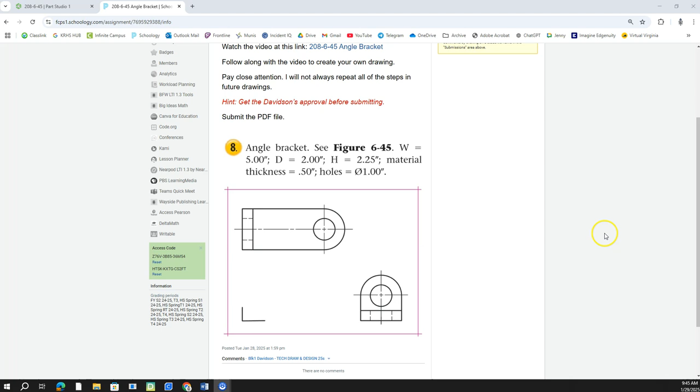Okay, we're going to be working on part 208-6-45. This is the video you're watching right now.

The angle bracket. Overall, the width from one end to the other is 5 inches. The depth is 2 inches. The height from the bottom up is 2.25 inches. The material thickness of the base is 0.5, and the thickness of the upright is 0.5. The holes going through it are 1 inch diameter.

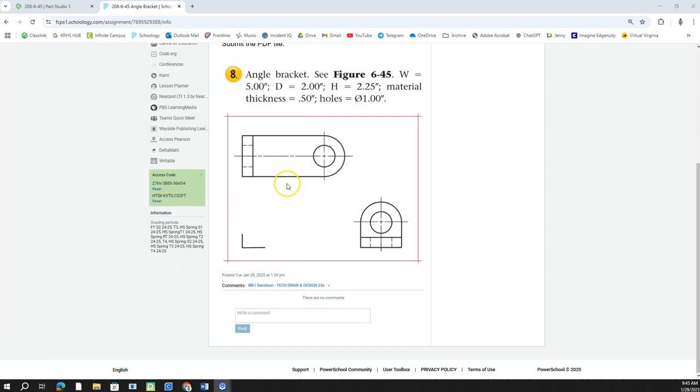In this view, they're giving you the top and the right side view, and your job is to come up with what the front view is. Should be easy in this program.

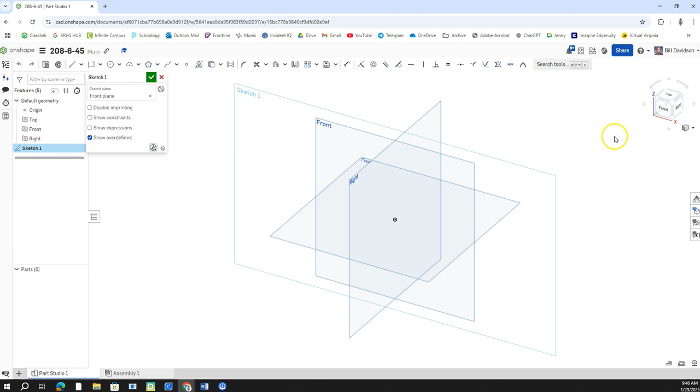All right, so we've got this established. I'm going to do this a little differently this time. I'm going to start with the front view, click New Sketch and View Normal To, and set that sketch plane.

I'm going to start by drawing a line that goes like this, from here down to here, out to here, like this, up here. I'm not worried about thicknesses or anything like that yet—I'm sketching first, constraining, then dimensioning.

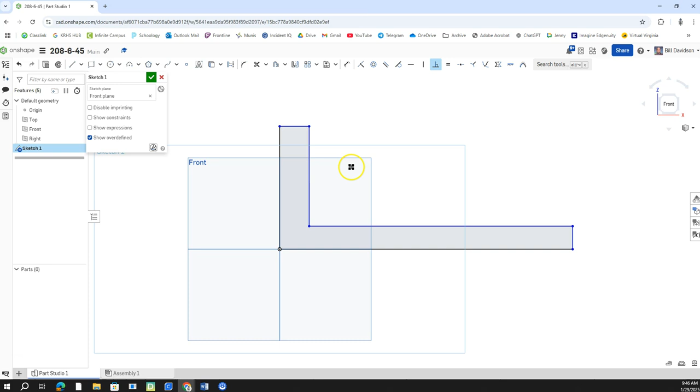All right, that's a little bit off, so I'm going to use the perpendicular constraint to make sure that's straight. If you can make it straight, great, but if you can't, that's all right too.

I'm going to put a dimension on this bottom line here because I knew that was 5 long. The height of it was 2.25, dimension on that one. The thickness of that was 0.5. And I'm going to say that these two are equal right here, this one and this one, so that should tell us what that is.

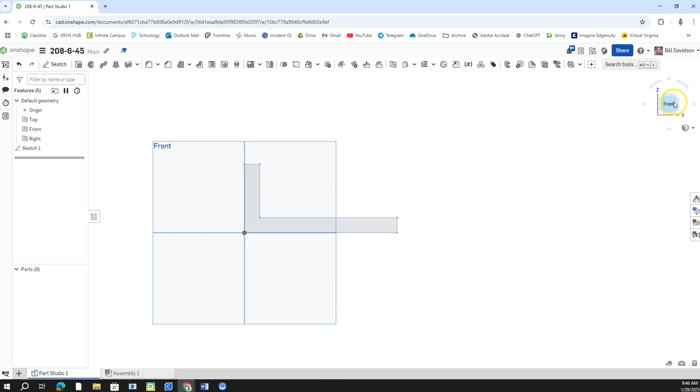So I'm going to finish that sketch, extrude that the thickness this way. And when I extrude this one, I'm going to do a symmetric extrude and change that to 2, so it extrudes in both directions, right there like that. And we should be equal, and we're good.

Now I'll go ahead and turn these off. All right, now this time, to make this fun, I'm going to use the fillet command, with a radius of 1 inch.

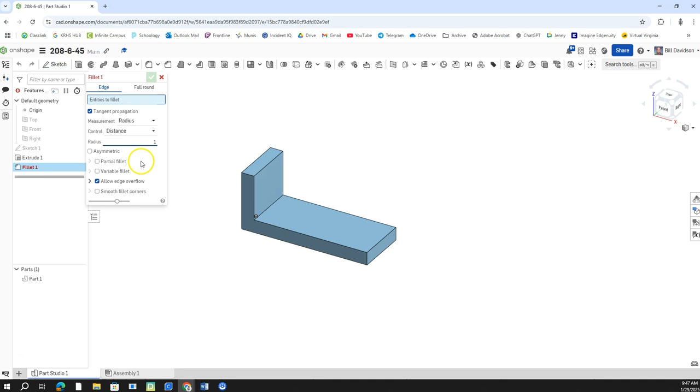I'm going to do one right here, one right here, one right here, and one right here. That makes those round edges, and I get everything the way I want it to be.

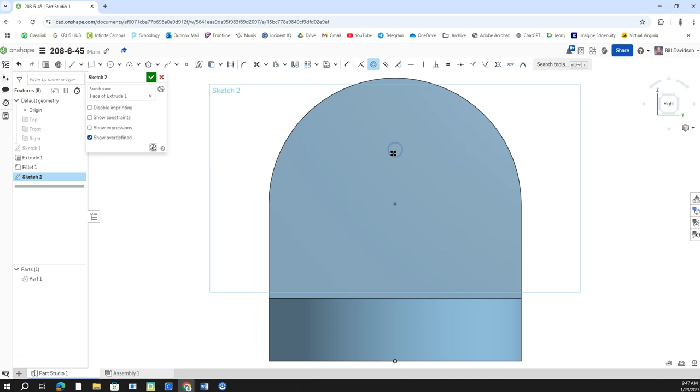At this point, I'm going to right click on this, click New Sketch, and click this one. I'll put a center point here, and I want it concentric with that, so it puts it right in the center. So I'll finish that sketch.

Right click on this one, click New Sketch here, and use View Normal To. Put this point right here, and make it concentric with this, so it should snap it right to that center point. So we're good.

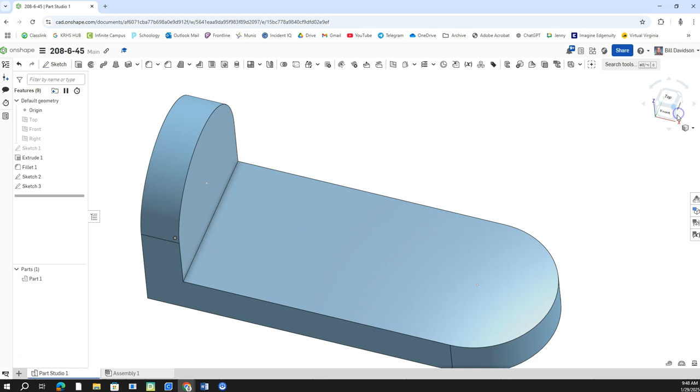Okay, now when I click the corner, I should be able to click the hole command. I'm going to change this so it's 1 inch. I'll click there and here at the same time, use the hole twice, and there's my part.

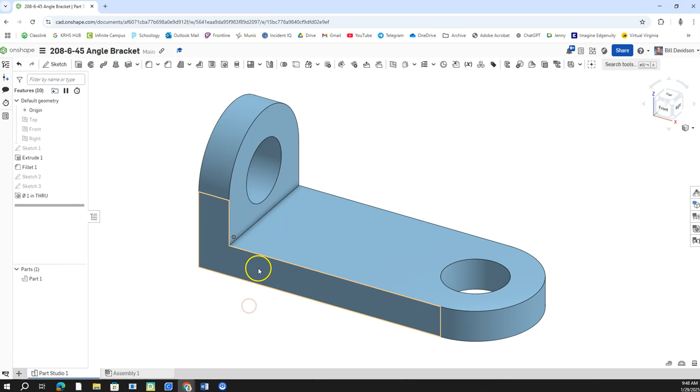All right, so we got the part done. We'll right click—I want to change this, I want the name to also have angle bracket in it. So then I'm going to right click on this, go to create a drawing of the part.

Let's do it. I'm going to click, it's in inches, I'll click that, and I'll go with the standard 4 views and see how that comes out.

If it works the way I think it should, it'll be exactly the way we want it, right there. So I'm going to right click and turn off the hidden lines, the phantom lines for the tangents, but show hidden lines here, and right click and show my hidden lines here as well.

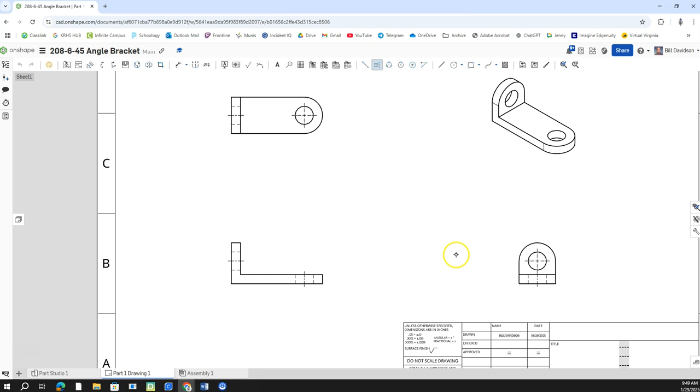All right, I'll start by putting center lines on those, right there, there, and this one here, so that aligns everything and shows everything's lined up. And we'll start putting dimensions on.

So I'm going to dimension that goes from here out to here. I don't like the way that one worked out. So this one—the length of that was, for some reason, important—so we'll go from here to here and put that on.

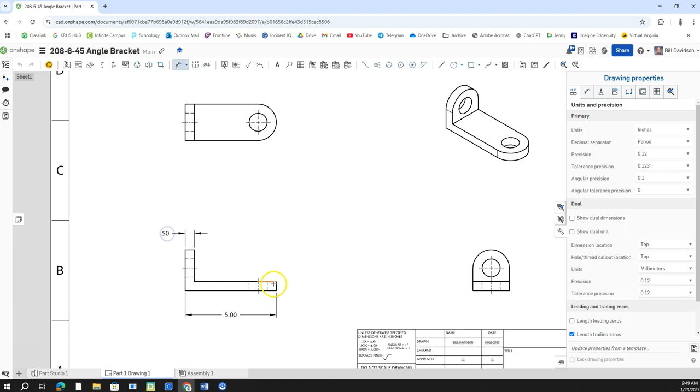Oh yeah, I'm going to change this to 2 decimal places. All right, I'm going to go ahead and put a dimension on this. The thickness is 0.5, and this thickness right here is also 0.5.

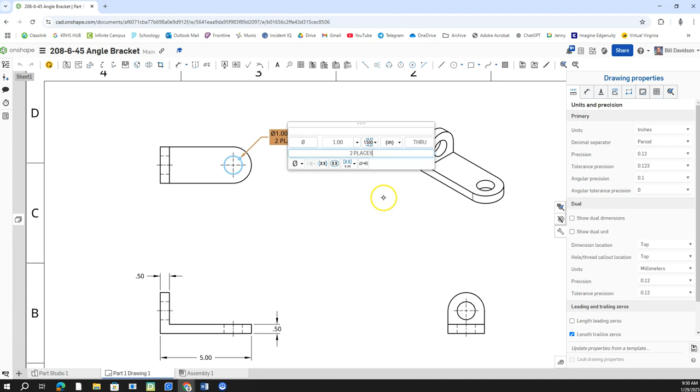I'll put a dimension on this right here that says that is through, space, THRU. I'll turn caps lock on because we use all caps, and put 2 places. Because I put 2 places, I don't have to do this again over here on this view. And because this one right here would be carved out of the outside, we'll put a radius of 1, and just put space TYP on the outside there.

So we've got all of the dimensions that we need except for one, which is going to be this one right here to tell us how tall this part is.

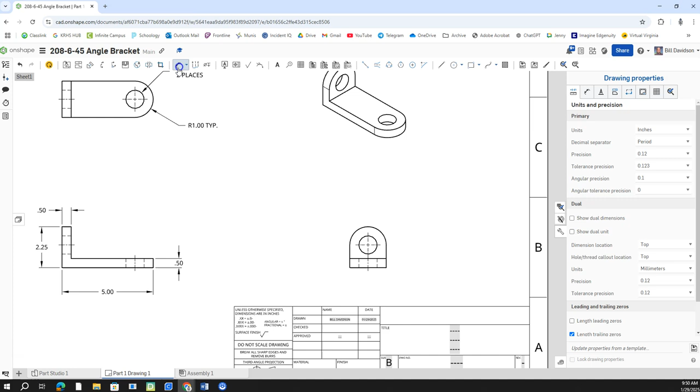Now, if you want to get a little crazy, you could put a dimension on that would tell us how to get to the centers of this right here, there to there. Technically, this is actually more correct to go like that, and this is actually more correct.

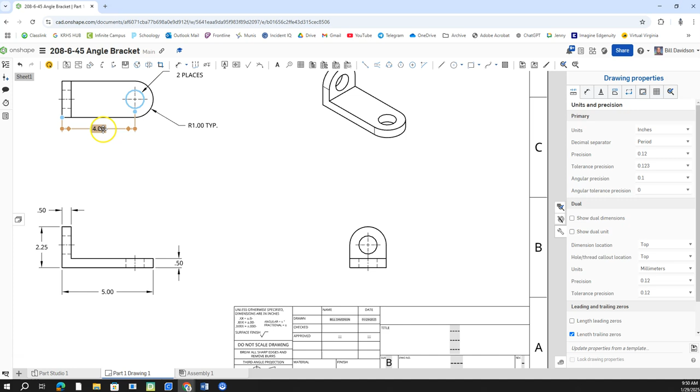But we're over-dimensioning by doing that because we have those numbers on there already. So you don't need to do that—go ahead, right click, and delete those two. Or if you deleted these things, those two would be fine.

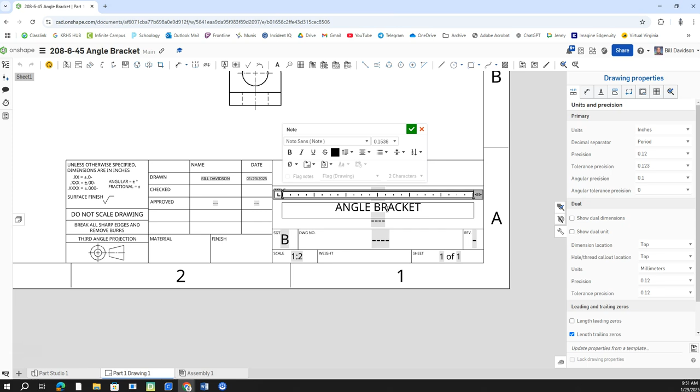All right, so then I'm going to look at all this stuff here. I'm going to give it the name, and that is angle bracket. Oops, what did I mess up there? Backspace, angle bracket. And I'll finish that one.

And I'm going to put a part number in here, and that part number is 208-6-45. And we'll finish that.

All right, so double click my mouse wheel, close this right here, zoom to the extents. This is where you would click submit, and we'll move on.